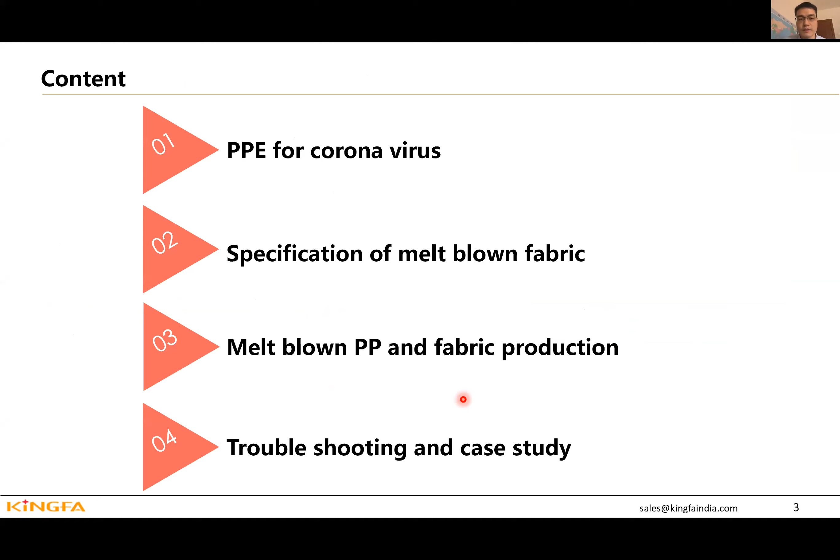We can divide masks into two types: one for civil or industrial use, and another for surgical or medical use. In different countries, they have different levels of masks, such as N95. The 95 means the level of filtration - they can prevent particles, droplets, or the virus from coming into our mouth or nose, protecting ourselves. So when we choose a mask, we need to understand what this means and why it can protect us.

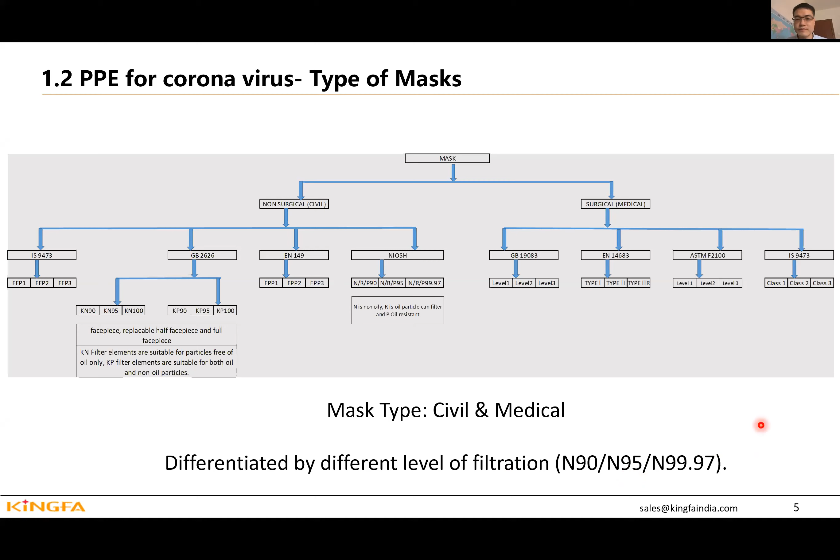So we have different kinds of masks. First is the gauze mask - in my hand, this is a gauze mask. The PFE is very low, only less than 20%. That means most of the virus will come through this mask and into our mouth. So this is not effective.

Then there's the cotton mask, which is also not very useful. Then we need to choose some medical mask or surgical mask. In my hand, this is a medical mask. This mask's PFE is about 80%, meaning 80% of particles can be prevented by this mask.

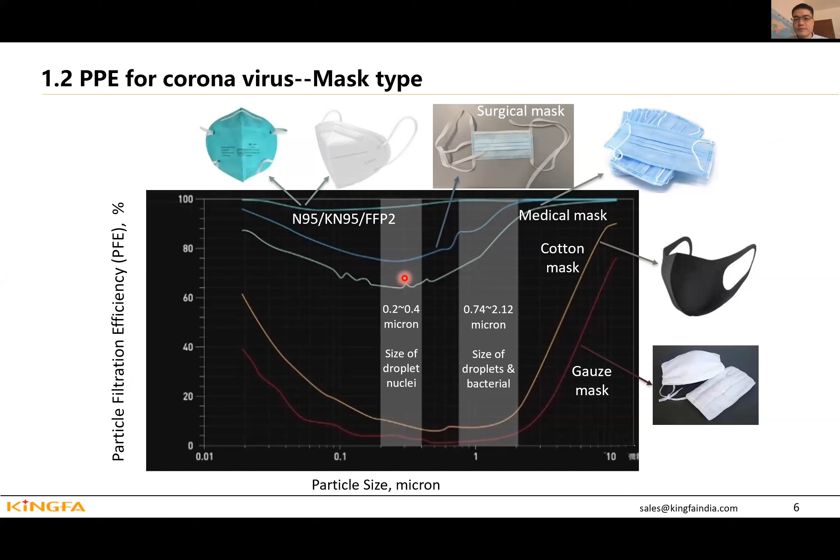We also have the folded N95 mask, or KN95, or FFP2. This mask is more useful because the particle filtration efficiency is above 95%. Most particles cannot come into the mouth. So some people will ask why this kind of mask can protect ourselves, but other masks are not useful. So we need to take a look at the structure.

If we cut this mask, we can find what is inside. This is a 3-ply mask. After cutting it, we find there are 3 plies. The outer layer is a spunbond fabric, and the middle layer is a melt-blown fabric. This middle layer protects us from the virus.

Here's a comparison of these two fabrics. The spunbond fabric is very strong and not easy to break - it has good strength, but the filtration effect is not good. The melt-blown fabric has a fiber diameter of only 2 to 5 microns, and the filtration effect is very good, but it's easy to break. So we put it in the middle layer. With this mask, the melt-blown fabric can capture the virus and protect ourselves.

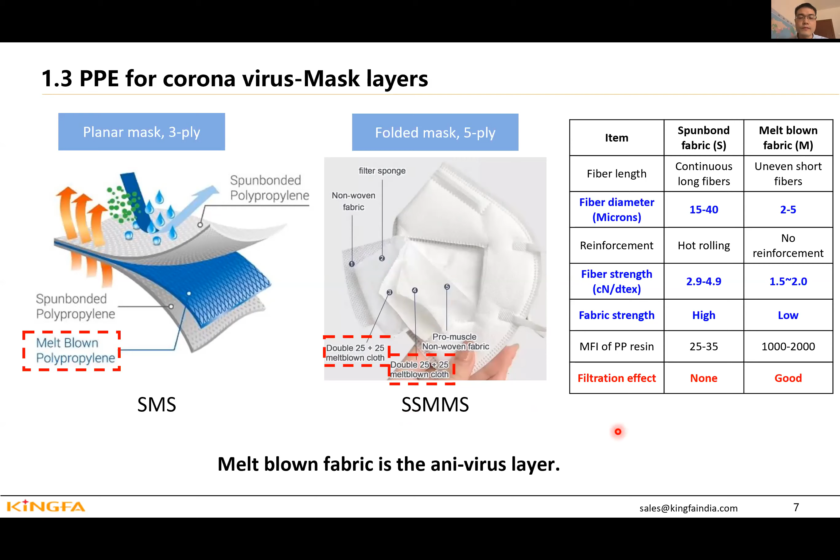So if we take a look at the microstructure of the melt-blown fabric, this is the microstructure. We can find the fiber is very thin, the diameter is about 2 to 5 microns, so they can stop some big particles. And around the fiber, on the surface, they have some electrical static, so they can capture some particles by the static electricity. So by these 3 factors - the fiber diameter, the even distribution, and the static electricity - this metal-blown fabric can

capture the virus. Then we can meet the standard of each requirement from the NIOSH, from the CE certification. Then we can meet the bacterial filtration efficiency or the particle filtration efficiency. So this is why the mask has this effect to capture the virus.

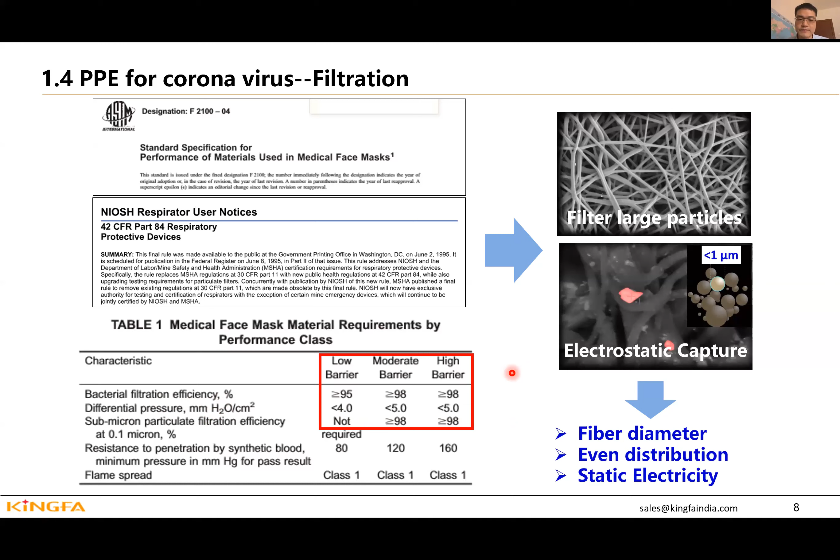In this slide, it shows different kinds of mechanisms to capture the virus, but the most useful is the electrostatic absorption. We can find around the fiber there are many positive static electricity, so that's why this is working.

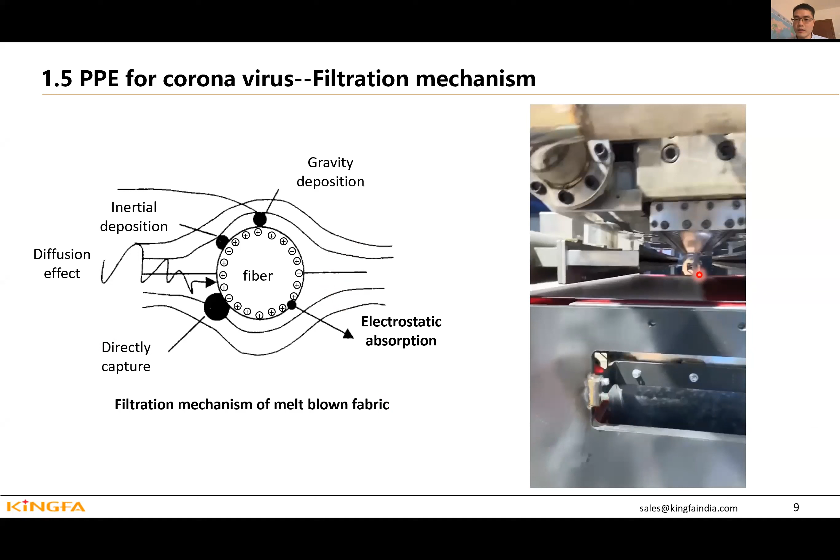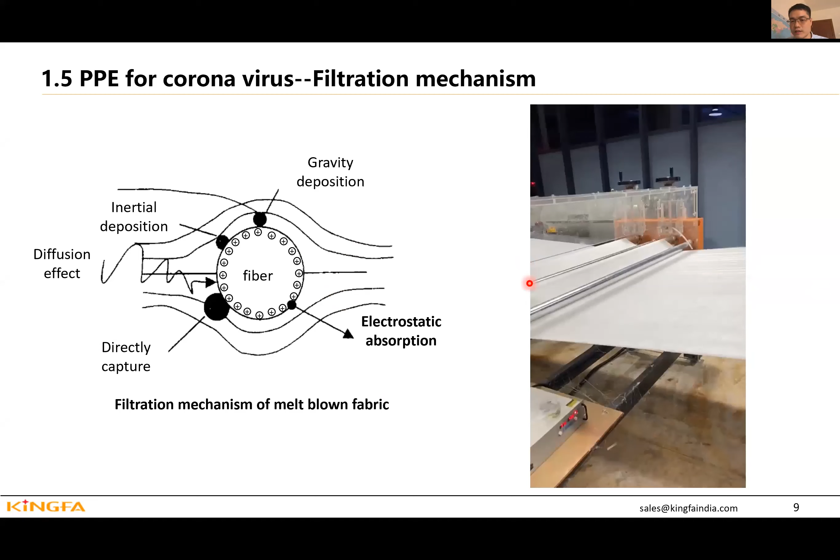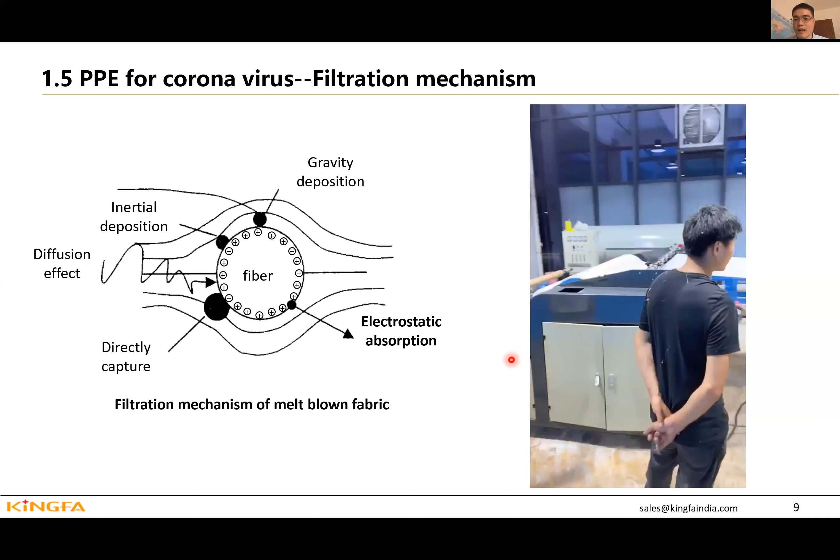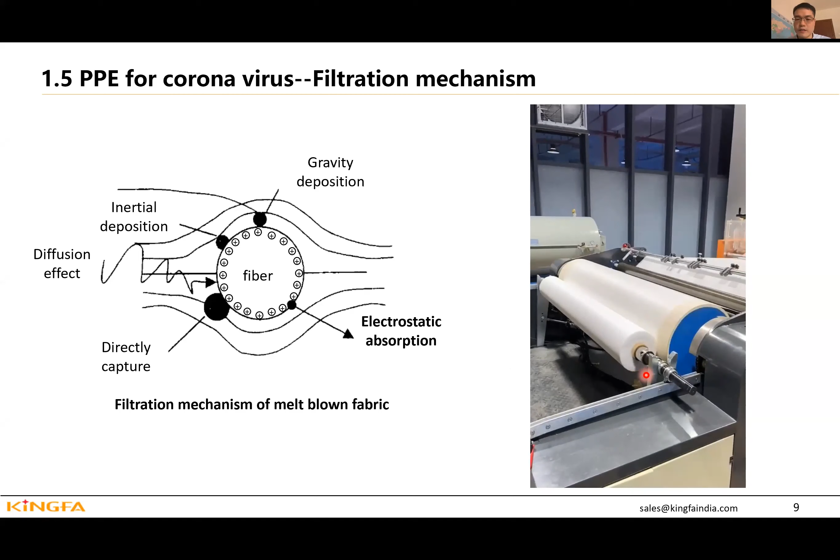And we can have a look at how this melt-blown fabric is produced. This is the die. The PP melt comes from this die and forms the fabric. Then it comes to this electric charging, and then this fabric has the static electricity. And after the cutting, then this fiber was wound. So this is the

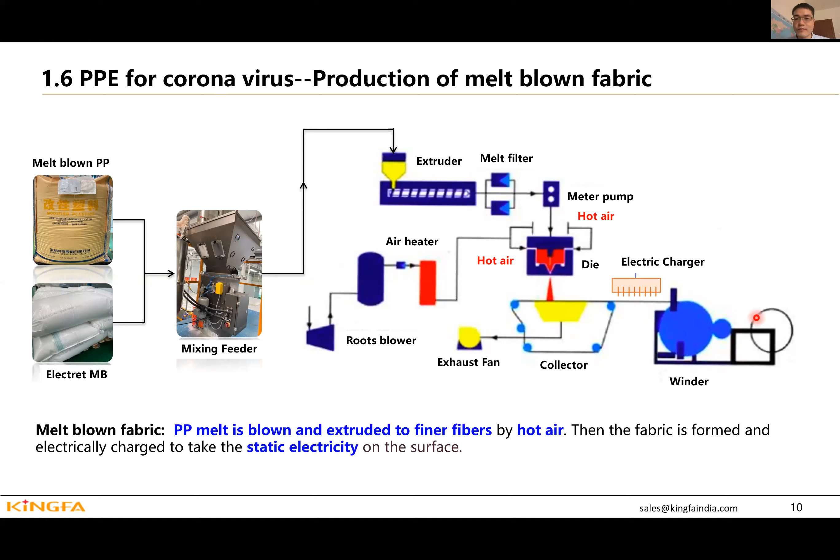And by this electric charger, the fabric gets some static electricity. Then we get the final fabric. Okay, this is some introduction to the melt-blown fabric, how it's produced.

And for this melt-blown fabric, they have some important specifications we need to check, whether it's okay or not. The first important one is the filtration efficiency. So we need to stop the virus spread, so we need to have this BFE and the PFE.

How to test the filtration efficiency? This is very simple. We have some salt particles from this machine, and these particles, along with some air, come into the test filter. In here, we put some fabric in this place. So we count the particles before this filter and after the filter. Then calculate how many particles were blocked or prevented by this fabric.

So if the efficiency is high, it means they can prevent more particles. So if the PFE or BFE is higher, that means it's more effective.

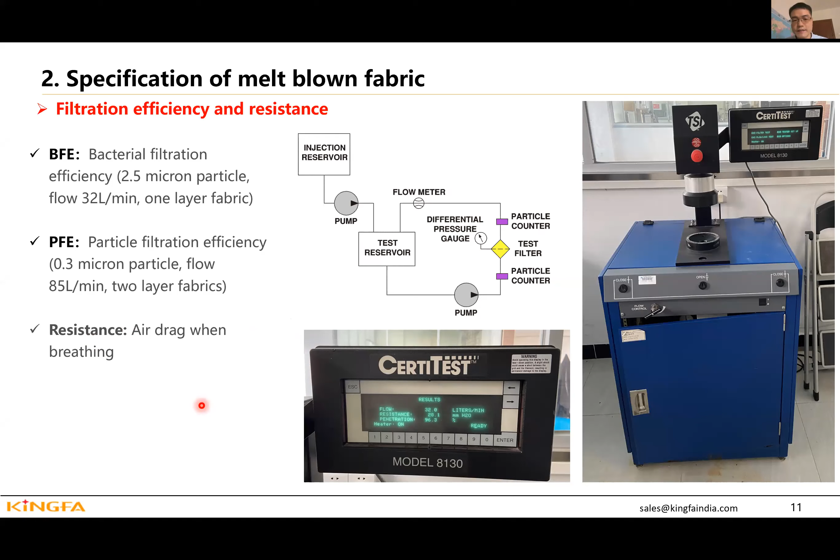Second, we need to control the grammage of the melt-blown fabric. The grammage is the weight per square meter. Normally we use GSM. Here we cut the fabric into some round pieces and then use the weight to get the value. And then, for example, if the grammage specification is 25 GSM, we have a 7% deviation.

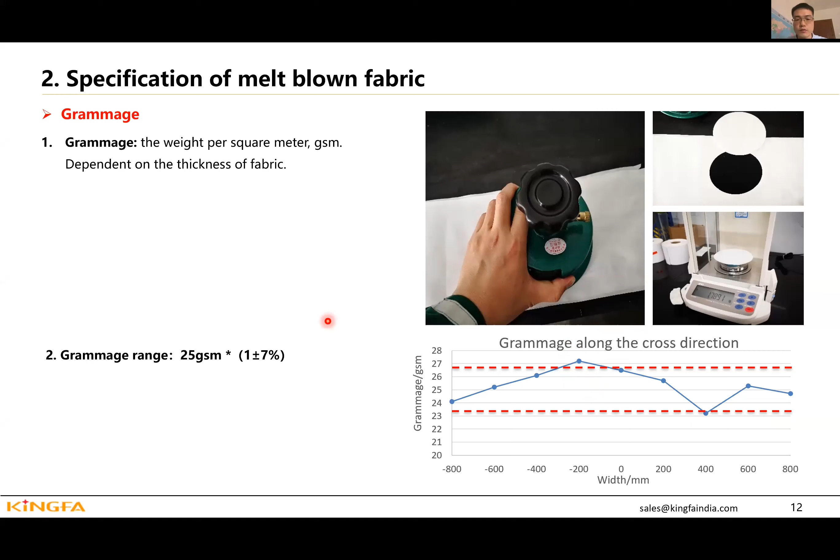So we can check along the width, at each place, what's the grammage, and find the value. If some value is lower or higher, we need to make some correction to make it stable, and to decrease or increase the GSM. So this is the grammage we need to control during the production.

The third part is the mechanical properties. When we use this fabric, they also have some tensile strength and elongation. We use this tensile machine to test the property. We cut the sample with scissors or a knife. The length is 20 centimeters, the width is 5 centimeters.

And our specification for this tensile strength is more than 10 Newton. Elongation is about 20%. If our test result is lower than this specification, that means the fabric is a little brittle and very easy to break. So this is when we get this fabric, what we should test.

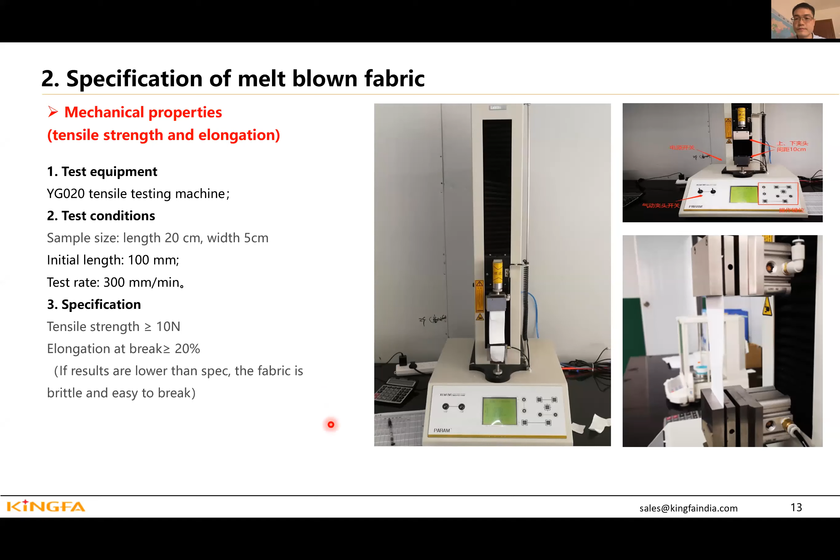Okay, on the third part, I would like to introduce how to make this melt-blown fabric and how to adjust the processing parameter. Because for this production, it's very simple. The principle is very simple.

The PP melt comes into the die, and in the die they have one spinneret plate. In this plate, they have thousands of small holes. The dimension of each hole is only 0.2 or 0.3 millimeter.

So the PP melt comes from this hole and then is extended to fiber by the hot air. So if the MFI is higher, then it's very easy to flow and easy to extend it to finer fibers. So we choose 1500 MFI melt-blown PP to make this melt-blown fabric.

Besides that, we need to control other properties such as ash content. If they have some ash content in melt-blown PP, it's very easy to block these small holes. That means we need to stop production. If the hole is blocked, we need to stop the production and clean the spinneret plate and clean all the holes. So this is very hard work. So when we choose the melt-blown PP, we need to follow this requirement, then we can get some continuous production.

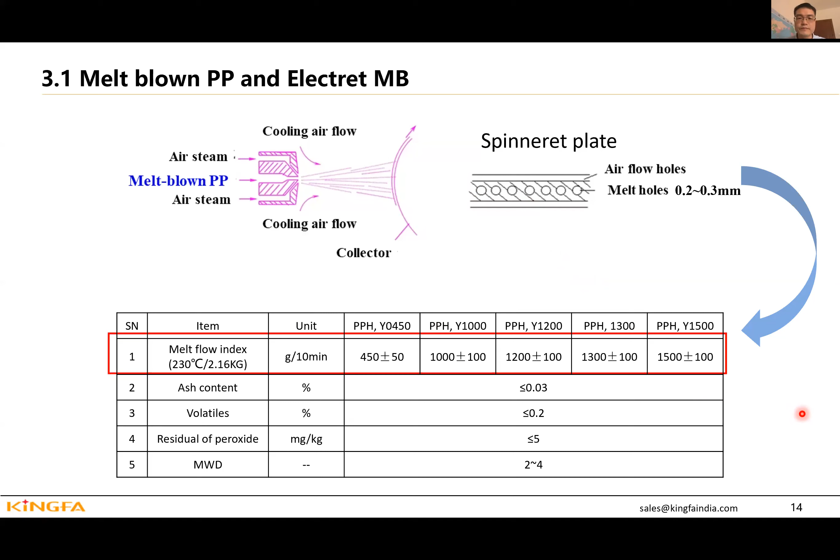And for this melt-blown PP, if we want to find 1500 MFI - normally the PP MFI is around 30. Some higher MFI is 100 for our injection grades. But for the melt-blown, we need to find higher. So how do we increase the MFI from 30 to 1500? This is one point we should find out the solution for.

We can use peroxide. We can add some peroxide in the PP, and then we run it through the extruder. Then we can get a high MFI. So we tested different dosages of this peroxide, and the MFI increased. Finally, we get 0.4% peroxide, then we can get 1500 MFI.

So this is how we make this product. They have some reaction in the extruder, then the PP molecular weight decreases, and then we can get a higher MFI melt-blown PP.

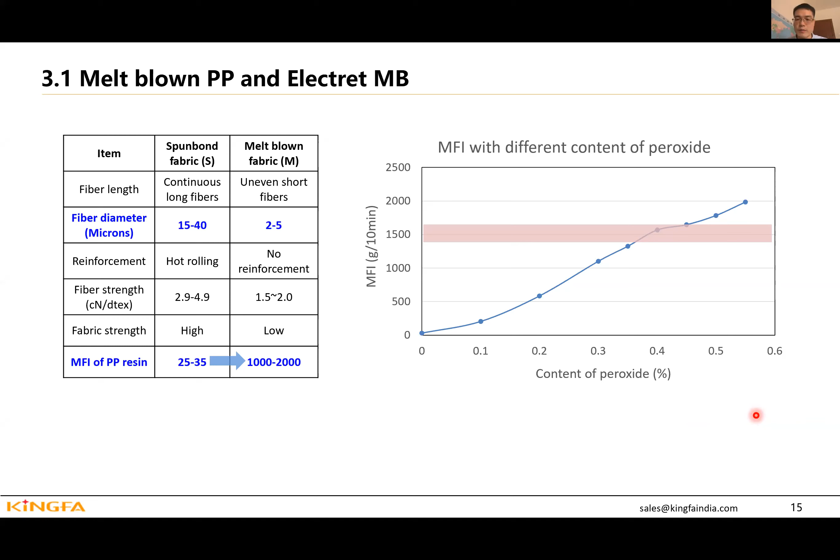Besides the melt-blown PP, we need to add some electret masterbatch. Why do we need to add this? Because for PP, the dielectric constant is very low. That means if we get electric charge in this fiber, we cannot get very much static electricity. So we need to add some nanoscale inorganic filler. This filler has a very high dielectric constant, which means they can capture more static electricity, and they can be used for a long time. So that's why we need to add this electret masterbatch together with the melt-blown PP in this production.

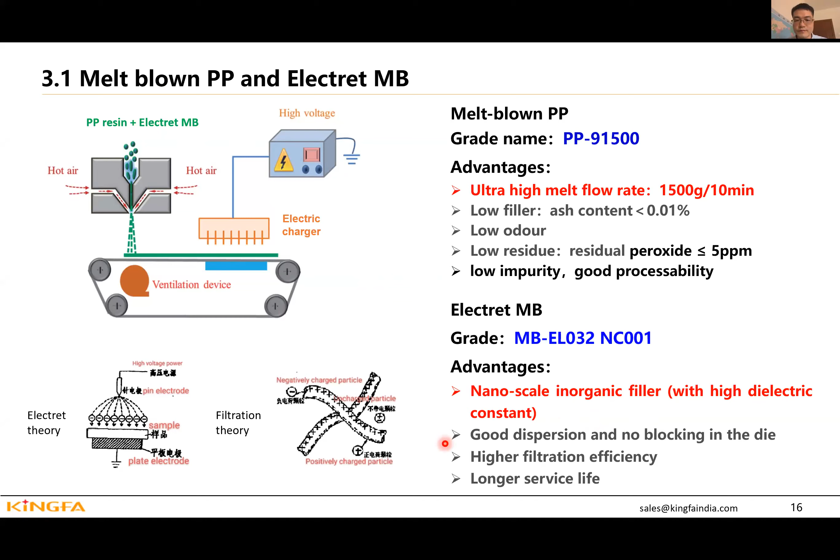Here is some TDS of Kingfa material for the melt-blown PP and the electret masterbatch.

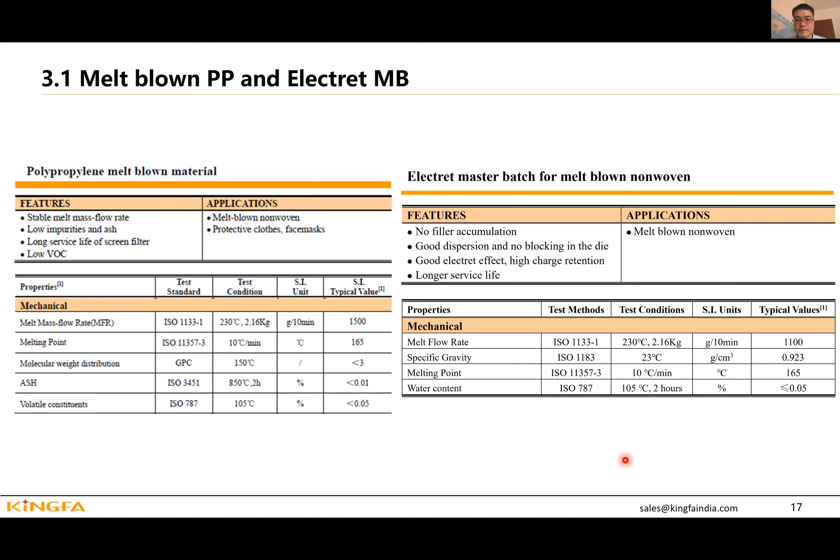Okay, we come to the processing. How can we make a good product of melt blown fabric? First, we need to control the grammage. We want to make a 25 GSM melt blown fabric. We need to find out the grammage is related to the frequency of the meter pump, which means the output of the extruder. Second is the line speed. So factor one - this frequency of the meter pump and the line speed - can influence the grammage.

But sometimes if we keep the frequency output and the line speed the same, sometimes the grammage can also change. So there's something different in this - a constant related to our raw material, such as when the MFI changes from 1500 to 1200, then the grammage will also change. Another factor is the mesh status on the filter and the die. At the 4 and 5, we add some mesh to filter out some impurities. If this mesh is stopped or blocked by some impurity, then the grammage will decrease.

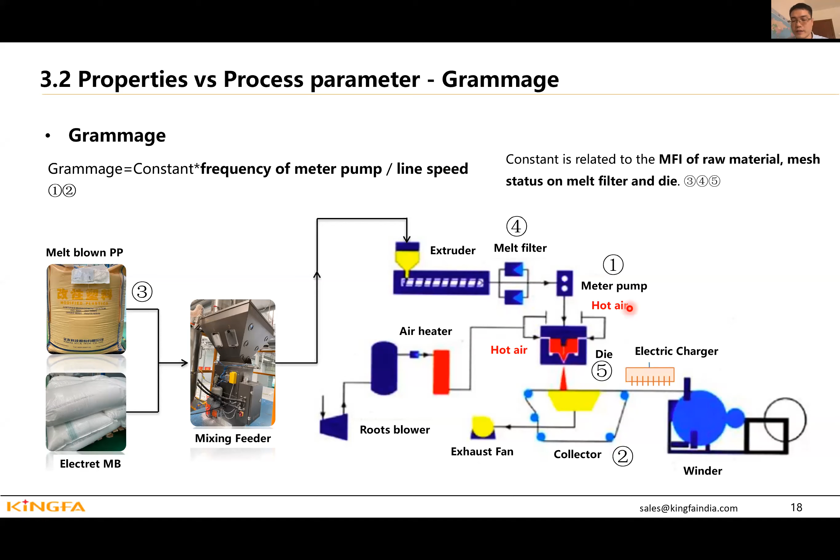Then second is about the fiber. The most important is the fiber diameter. We want to get a diameter of 2 to 5 microns. This is very critical to our filtration and to the strength. So first we check the temperature - both the melt temperature and the hot air temperature can influence the fiber diameter.

We first check this on the left figure - this is the distance from the spinneret to the collector. When the PP melt comes from the hole, the dimension is about 70 microns. But after the hot air extension, then it decreases to 5 or 10 microns. So if the temperature goes from 260 to 360, the final fiber diameter can decrease to about 5 microns. So if we want to get a good finer fiber, we need to increase the melt temperature. So this is the melt temperature influence.

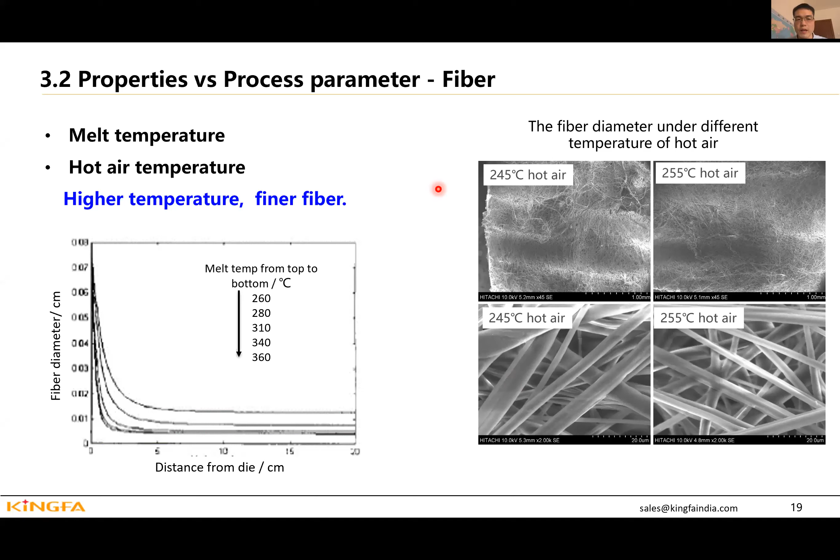Also, our output can influence our fiber diameter. In this photo, we see the fiber diameter related to output. First, let's take an example.

If we want to make 5 micron fiber, we find that in line 1, the output is 0.7 gram per hole per minute. If we have a die with width 1.7 meter and 2,000 holes, then the output is 84 kg per hour.

But if we want to make 2 micron fiber, then the output is about 0.1 gram per hole per minute, and the output then comes to only 12 kg per hour.

So by this figure, we can calculate our output and the final fiber micron we can get. This is the output: if the output is higher, then the fiber diameter will become bigger.

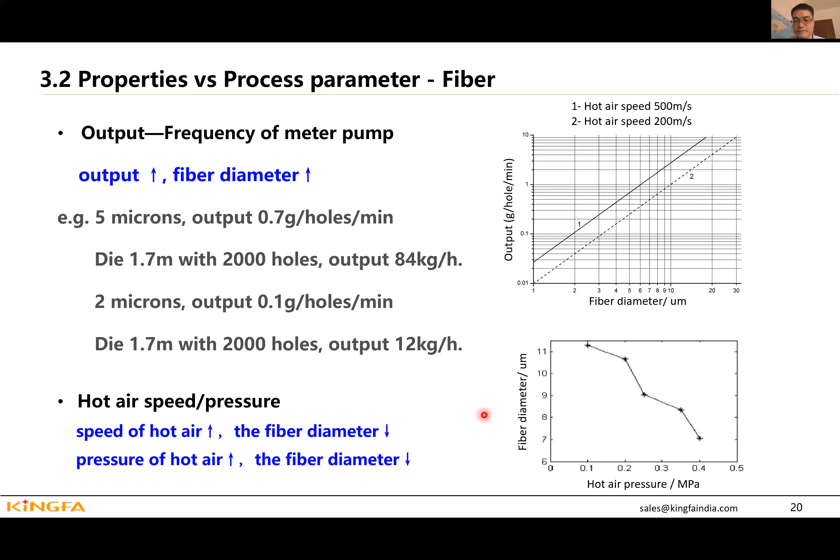And then another factor is the die to collector distance.

During machine design, we have two kinds of design. One is horizontal, where the die comes here and the fiber flows horizontally. Another is vertical, where the die goes from up to down, and below is the collector. The horizontal design is mainly for small machines, and for big machines larger than 1.6 meter width, we need to use the vertical design.

During our production, the collector is far from the die, but after normal production, we need to move this collector close to the fiber, close to the die. If we decrease the distance, that means the cooling is not enough, and the fabric bonding to itself becomes much better. Then the fabric can become hard and strong, and also the flying fiber will decrease.

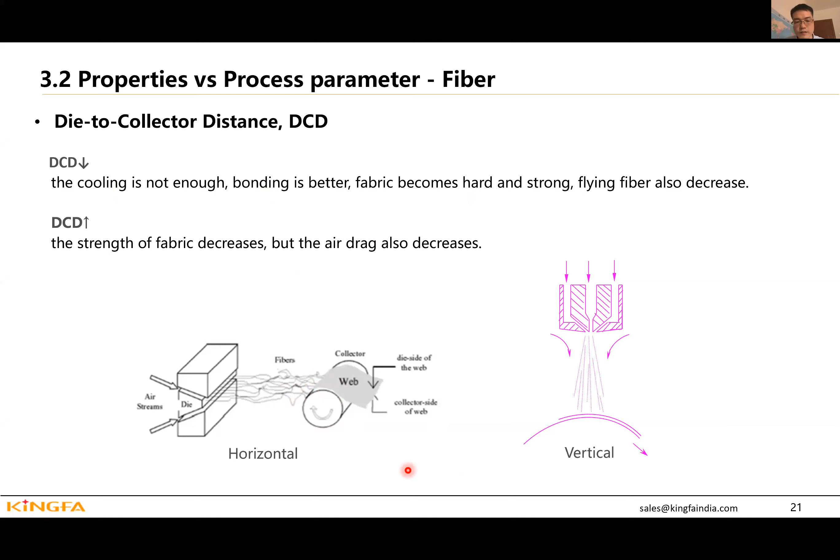After the fiber comes out, it will come to electrical charging. We have different ways to get electrical charging. In most designs, we choose the D design method. We can see here, the fabric comes to the electrical charging.

This steel bar is connected to the ground, and on the bar is an electrical wire. This wire is connected to a machine which has a high voltage, and it can charge the fabric.

After charging, our PFE and BFE will increase a lot, for example PFE from 28 to 76. And if we add some electret master batch, then the PFE can reach 96%. So this is the effect of electrical charging.

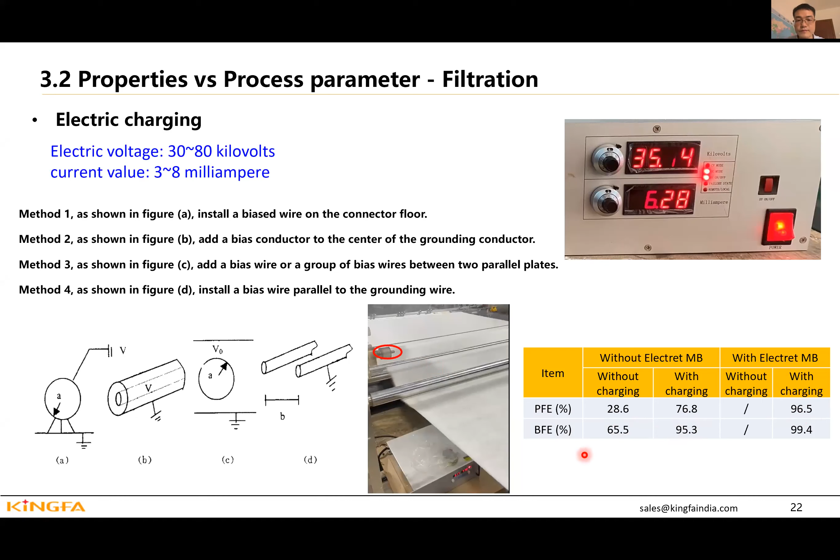Also, the distance of the electrical wire to the fabric is critical to filtration. If the distance is 10 centimeters, much closer to the fabric, the filtration will become very high. If the distance is far, then the filtration is not good. So we should also find a good distance of this electrical wire to the fabric.

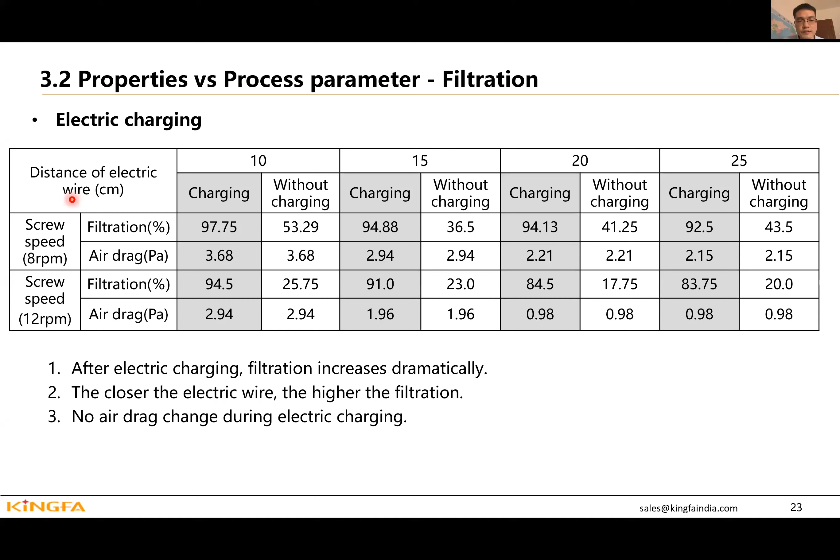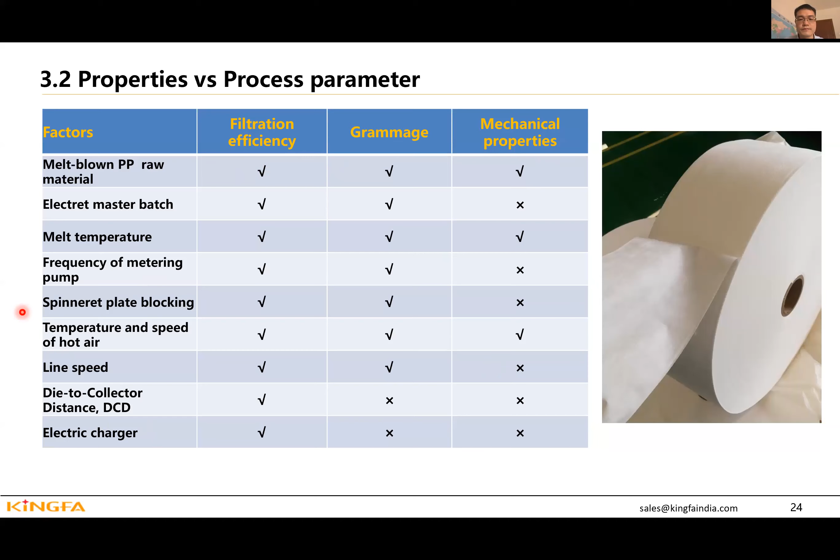Okay, we go to the last part, about troubleshooting and case study. During our production, there will come some defects. The first one is the crystal point.